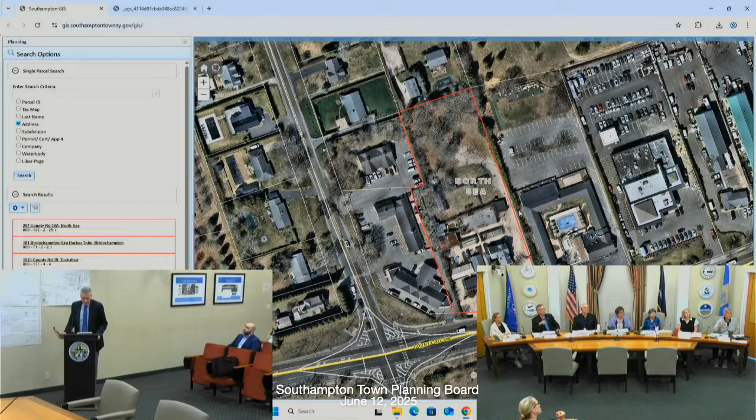As the legal advertisement indicates, the property is located at 257 County Road 39A, which is 2 lots east of the North Main and County Road 39 intersection, just outside of Southampton Village. Again, the property is 2 acres in size and is located in the HB zoning district, so the dispensary is a special exception use, and that's part of the application tonight.

The second part of the application is to legalize a couple of structures that were refurbished around 2017. They did get a CO during that process, but as Anthony and I researched the property, we didn't find where this board had approved it.

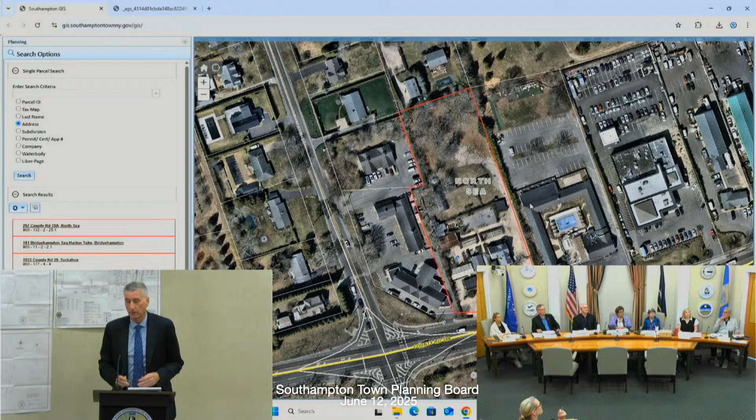And those 2 structures are here. It's a frame garage. Looking at the prior site plan, there was a storage building, there was a shed, and 3 truck bodies that had been approved before. I think that's a significant improvement.

The other structure was 2 sheds that were merged into a new shed. So we're trying to legalize those 2 structures, and then we're looking for a special exception approval for the dispensary use.

We have submitted a petition which we believe satisfies all of the requirements of both the general standards and the special conditions and safeguards. And that's basically the plan.

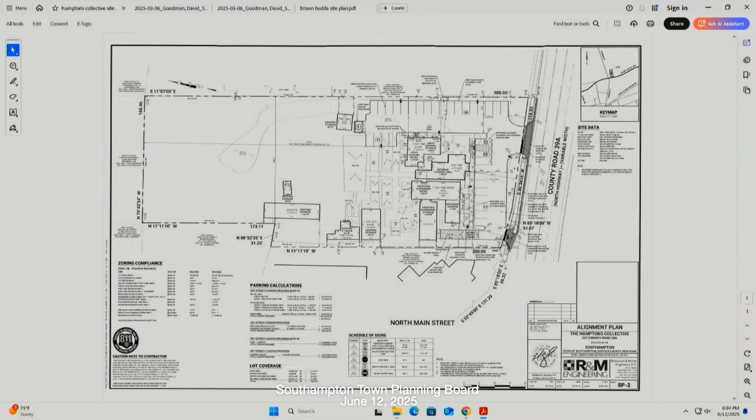The dispensary will be located here. This will be the storage, and then that's the retail area. There's another proposed storage area associated with the existing use, which is, I guess the best way to describe it, a furniture use — they refurbish old pinball machines and have an eclectic mix of furniture. There's a lot of storage on the property, and that use requires that storage.

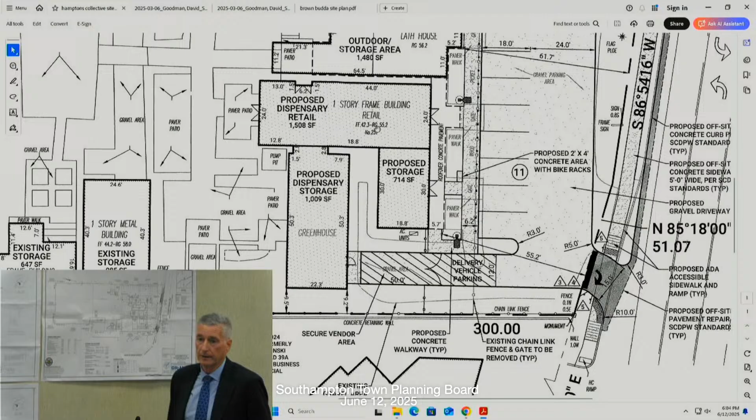You might remember this property, Dennis — I'm certain you would — as Frankenbach's Garden Center, and then it became Meacock's Gardens, right? Yeah. So you're only occupying a portion of it. Yes, these two structures right here.

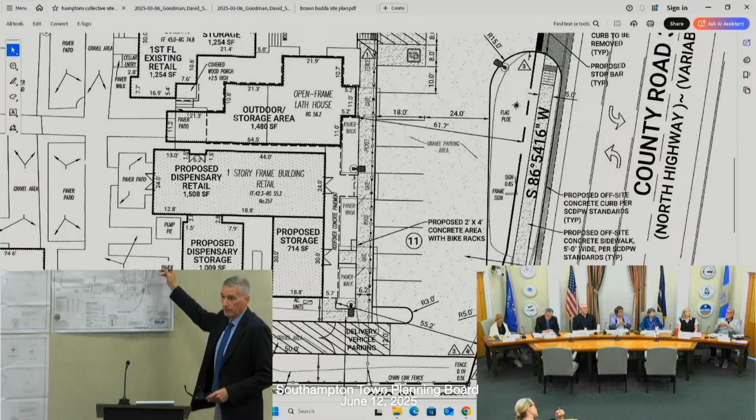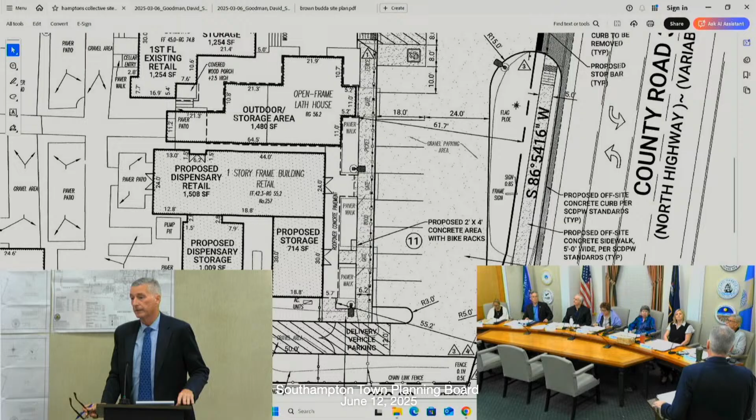We did go to Suffolk County DPW, and what you see with the entrance, and then this is limited to an exit only, is the ultimate decision of the DPW. We have our engineer and our traffic engineer, Matt Aylward and Keenan Cody, who can talk to that if the board's interested, but we've been through that process with them. They designed the entrance and the exit.

The only other issue that I think it's necessary to bring up, and something that as we go through this process we need to consider, is there's a nightclub located next door.

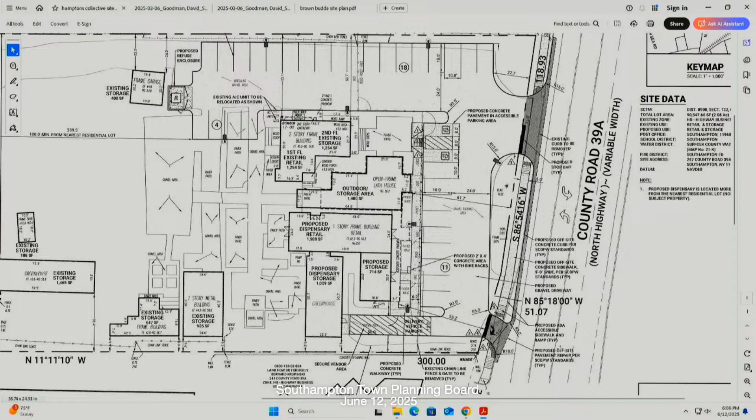We've had a lot of difficulty with people coming from the nightclub and trying to park on this property. So there are some security measures we'd like to take on a going forward basis to prevent that. We've had some vandalism and that type of thing, so that's one of the things to keep in mind. We need to have a discussion about cross-access to that property, because that will open it wide open to people parking on the property, causing mischief.

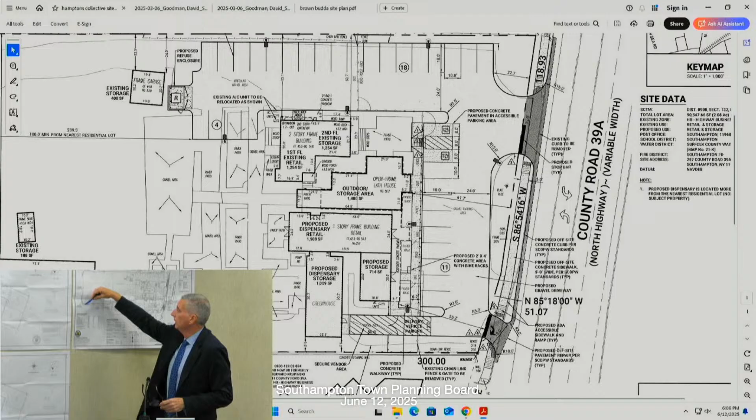Good to note. The other major factor is the setback from the residential properties here. There's a 100-foot required setback. The dispensary here I measured is about 350 feet, so about 3.5 times what the requirement in the code is. And with that, I will conclude and answer any questions.

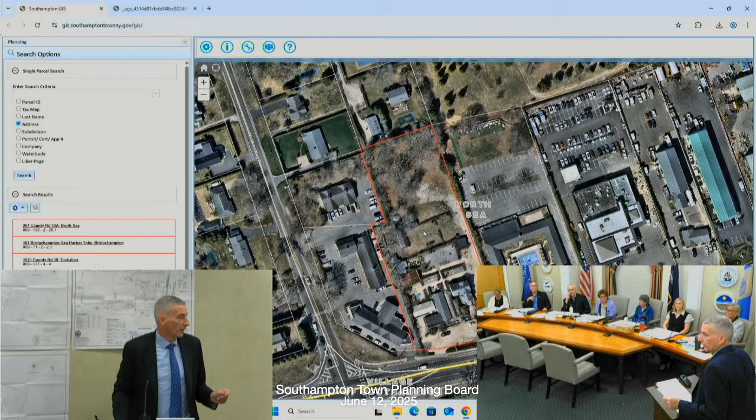We have our engineers here, we have a couple of the owners, Matt and Ben, here tonight, so we can answer any questions from the board. Could you just real quickly go over the entrance and exits, how that's going to work?

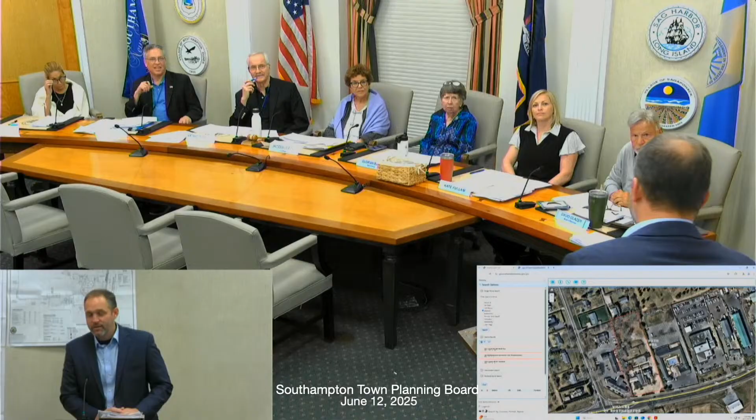I'll get an expert up here, so you don't have to listen to a lawyer. Matthew Aylward, R&M Engineering, Site Civil Engineer. As Mr. Gilmartin said, the easternmost access will be a full maneuver: right-ins, left turns out, right turns out, and left turns in. The westbound exit is limited only to exit only, and that's a right turn only, right out only.

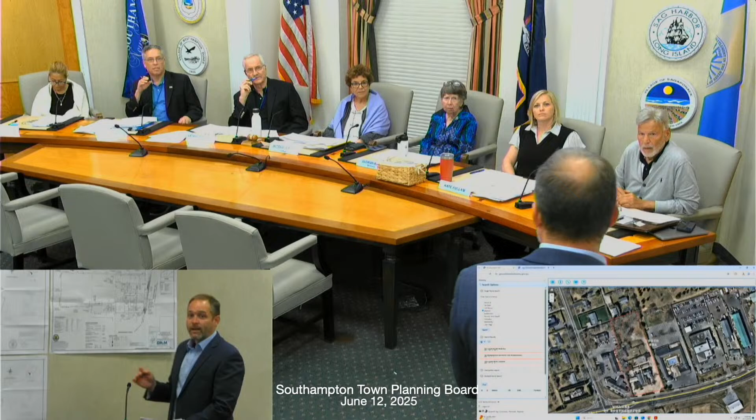That was westbound, correct. That was what we discussed with the DPW, and this is exactly what they requested we do, in addition to sidewalk and new curbing along the site frontage. So they approved it, DPW approved it. Right, so we filed with the DPW. We're going through that process of approval, but in a meeting that we had, this was exactly explained to us how they wanted it, so what's reflected here is what they told us to do. And you have the center turn lane in that section of 39. That's correct, dual turn lane.

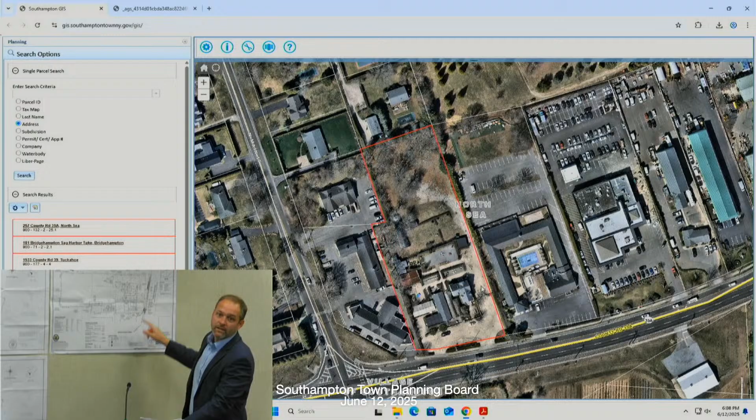Okay, thanks. Any other questions before I open it up? Is there anyone that wishes to speak to the application who's here?

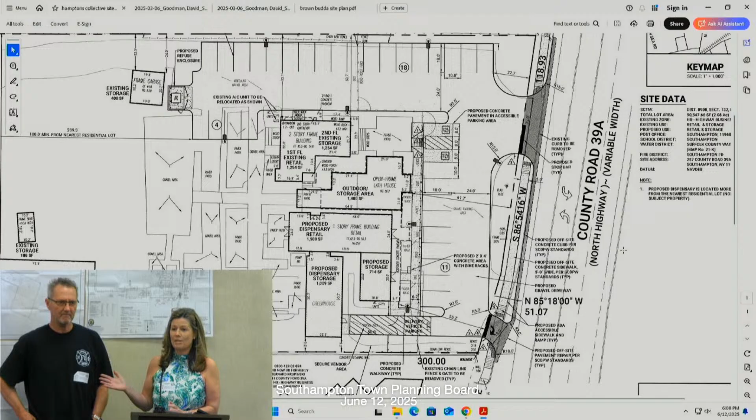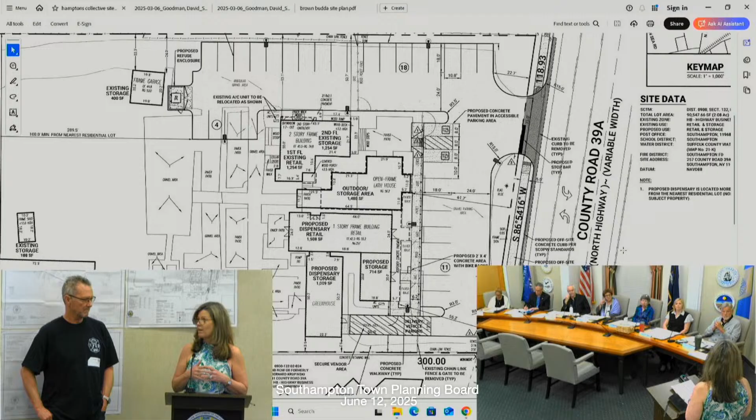Eileen McWilliams, is that? Hi, give us your name and evening. Eileen McWilliams, and this is my husband, James. We really only recently received the notice of the public hearing, so we haven't had a chance to digest as much as we hoped we could. So I respectfully ask if we can keep this open so we can explore more. I'd really like to submit something in writing that's going to be more eloquent than my speech tonight. You'll have a few days to do that. Okay.

So I apologize if I'm rambling, I get nervous and I ramble. But since I'm here, I would like to express some concerns and some comments related to this application.

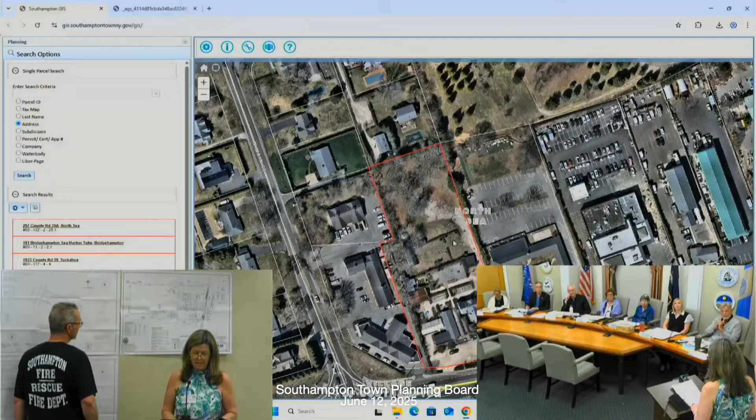A little bit of background here. James and I live at 8 Newberry Lane. That is the property David was just talking about, is our whole entire backyard, we share that border. We are local. James actually just received his 40-year service award for Southampton Fire Department. He's lived there for 35 years, raised his 2 kids there. I've lived there for the past 23 years, and I work locally for Squires and Holden Surveyors. We're year-round residents, and we're blessed that our 3 young granddaughters live locally, and we spend a lot of time there. As you mentioned about the Frankenbach property, James was in the Frankenbach family and acquired this property when the Frankenbachs subdivided, and he was part of the family business. So it was a whole family shebang for a little while there, actually a long while.

I was able to do a little bit of reading with the code. I'm not an expert, but there were a couple things that jumped out at me that were a little concerning. They used the word community facility.

There are certain setbacks, and I remember when his kids were little, they used to do karate at a facility right next to the subject property. I believe it's still there, maybe under a fancier name like jiu-jitsu, and there's swimming right there. I just want to make the board aware in case the distance is in fact a conflict.

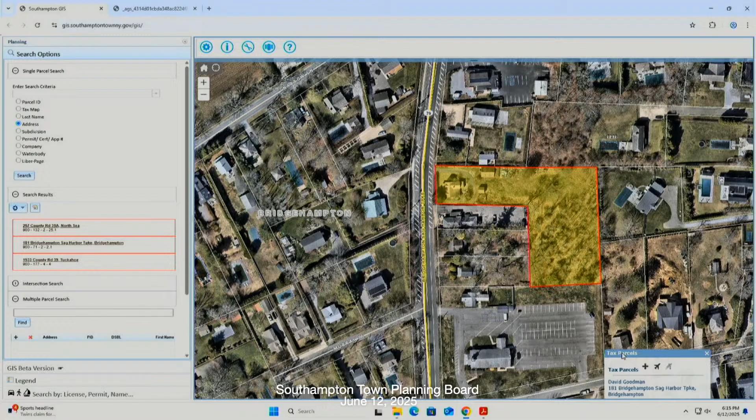The application before you is for a density incentive subdivision, where an existing two-family residence will remain affordable housing, and 2 new lots will be created to the rear of the parcel.

The location is ideal for affordable housing, as it is within easy walking distance to Bridgehampton Village, the Bridgehampton School, and public transportation. The parcel was originally 2 lots that merged as a matter of zoning in 1985.

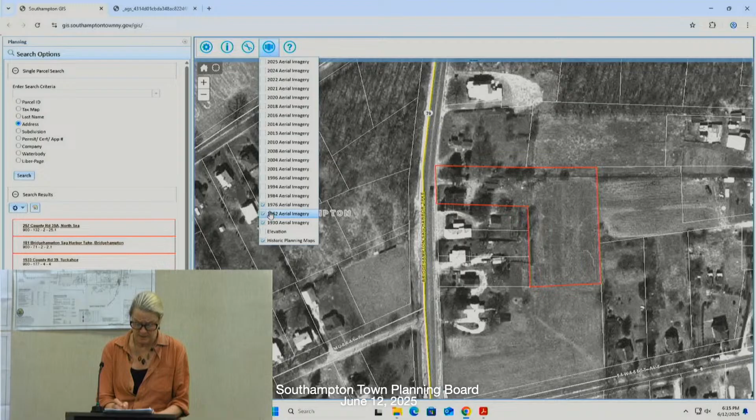The property currently yields 2 lots, but the density incentive for a subdivision with affordable housing is 50%, or 1 additional lot, for a total of 3. The parcel is a perfect candidate for density incentive subdivision consideration.

The 2 additional lots will each be approximately half an acre and compatible with the surrounding land uses. The proposed subdivision will not adversely affect the environment, as IAOWTS septic systems are proposed for all 3 lots, and this will be consistent with the town's comprehensive plan.

The project also meets the standards of Section 330(9)(d)(1)(a) through (c) regarding the need for affordable housing in Bridgehampton. The character of the community will not be negatively impacted by the increased density, and existing public resources are adequate.

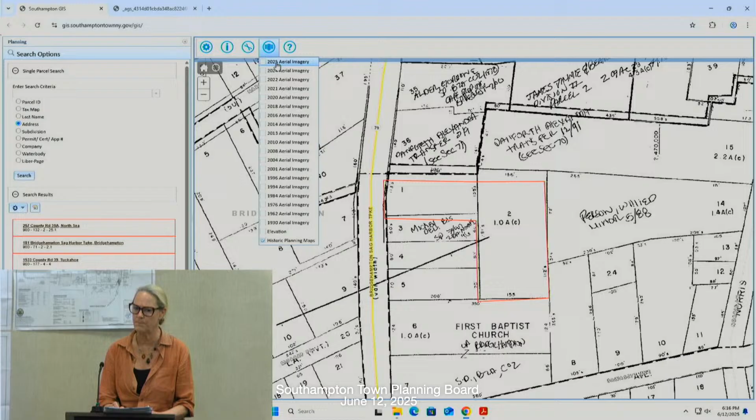The property has a pre-existing certificate of occupancy issued in 1986, following a submission of many affidavits attesting to the fact that this had always been a 2-family dwelling.

There's also a detached 2-car garage and 2 sheds. The garage will be demolished and the shed relocated.

Because the existing 2-family residence will become part of the town's affordable housing inventory, TDRs are not required from the town. We think the health department will require 1.5 credits, as the property is in groundwater management zone 5.

However, an application is currently pending with the health department, and we have just recently received the plans for the existing house and the square footage for each of the apartments within the house, which will factor into the health department's ultimate density equation. So we will be getting back to you with those numbers once we go back to the health department.

But we're not going to go back to the health department until we have received the summary of this meeting, any conditions and map revisions that need to be made on your request. Get those done first, and then go back to the health department and come back to you comprehensively at the same time with the same map.

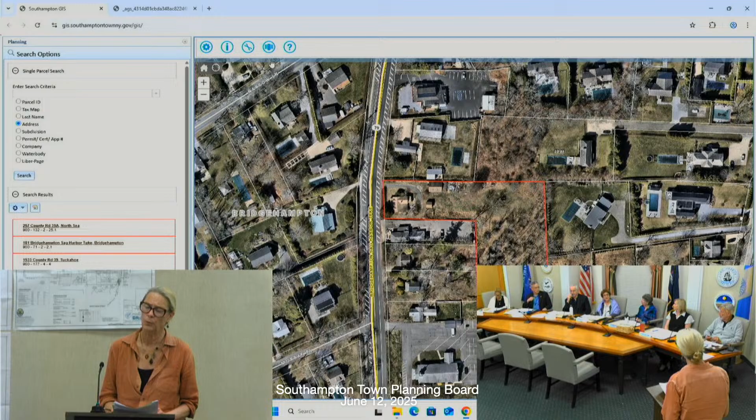Great. So I have a question, because I know the property well, I live just up the road. You're going to take the garage down, so that will be your driveway in. Correct. And it's a very busy road.

Correct, super busy road, so there you have just one access point. The county DPW has already weighed in, and they want to see 20 feet of asphalt here, so that there's no gravel grinding when someone tries to pull out onto the busy road.

Okay, good, that was my concern. Any other questions from the board?

So there'll be a total of 3 dwelling units? 3 buildings: 2 houses and 1 multifamily, which the town housing authority has expressed an interest in purchasing and maintaining as perpetual affordable housing. Okay, so total of 4 dwelling units.

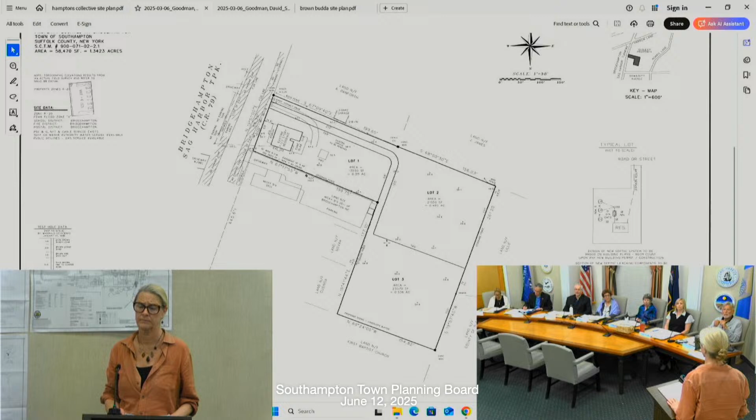4 units, that's units, correct. But they're small, one's like 700 square feet, one's like 1,200 square feet.

So there are 2 apartments in the main house, the old house in the front, and then 2 new units in the back. That's correct, yeah, 2 new homes in the back.

Right, yeah, these are small apartments. They both have 1 bedroom upstairs, a living room, but each have a kitchen.

I don't have the total square footage here. Oh yes, I do. Unit 1, the first floor is 487, the second floor is 352, so that's about 800 square feet. And unit 2 is 440 and 273, so about 700 square feet.

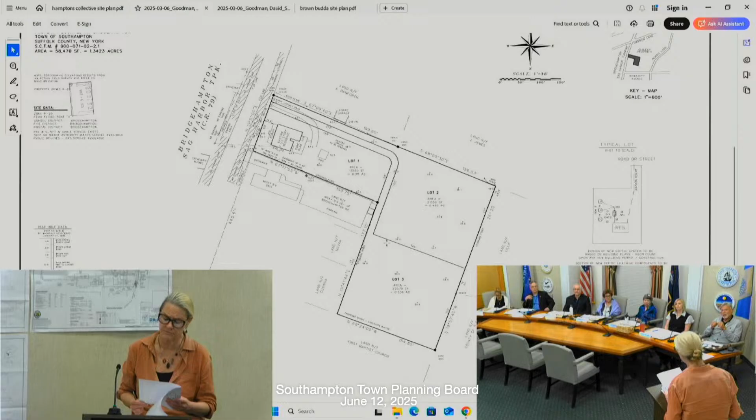So they're small, rentable, and definitely accessible for the area and the need in Bridgehampton.

And the 2 rear lots will be market rate? Market, right, that's correct. Right, okay.

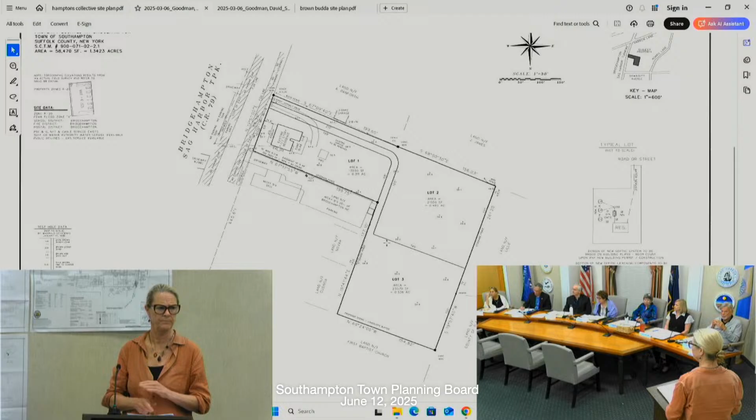It's an archaeologically sensitive area, so you'll have to do your review on that. I believe we submitted that already. Oh, you mean doing a phase one? We'll do it in the pre-app report.

Okay, any other questions? Anyone wishes to speak to this application?

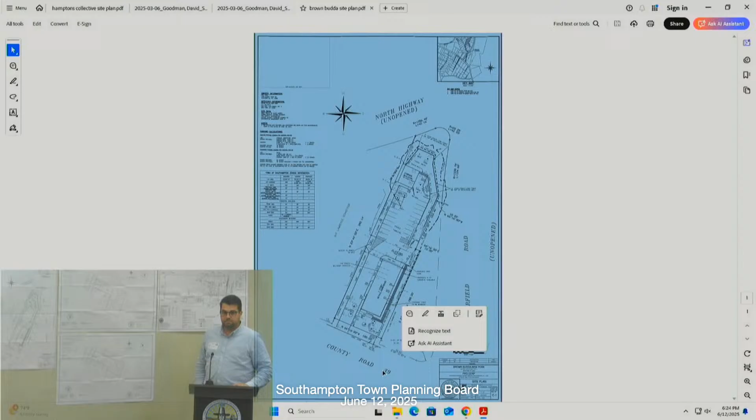Okay, we've seen this before, so. Yes. Are there any questions from the board? Is there anyone, and there's no one here, so is there anyone on Zoom, Peter? No one on Zoom.